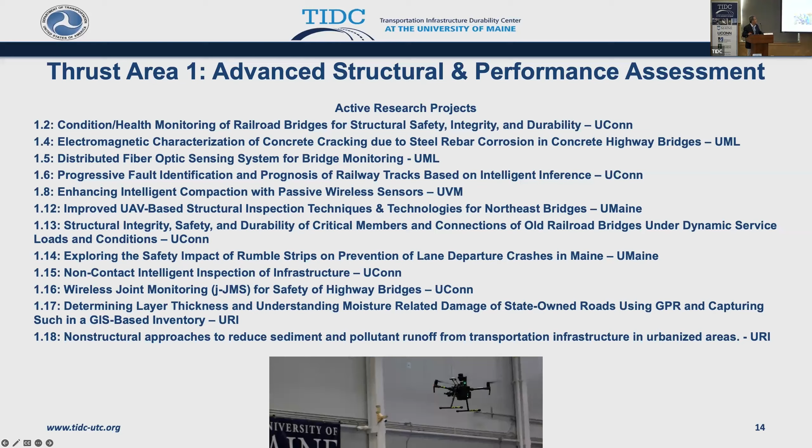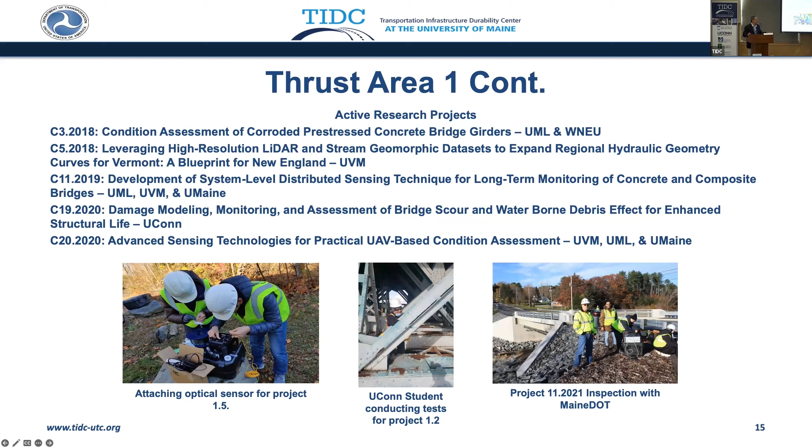In thrust area 1, there's a number of active research projects. You can see here researchers putting sensors on bridges, UConn students conducting tests for a project, and an inspection of a new next generation bridge that was developed at the center here in Hampden, Maine, being tested in collaboration with the Maine DOT as well as researchers at UMaine and in Massachusetts.

Some projects have been implemented as part of this work in thrust area 1. A major project that Professor Bill Davids has led is field testing of existing bridges. Oftentimes the analysis shows us that a bridge should be posted or shut down, and you ask yourself, is it really ready to be shut down? Is there any more life in that particular bridge? That's the question Professor Bill Davids asked himself. So he's developed advanced numerical tools and analysis methods, combined with load testing, to actually see if the bridge really needs to be posted or not.

What we found out is he's been able to save a lot of bridges from being posted or shut down. That's the big deal - that saves a lot of money. Can you get another 5 years on a bridge? Can you get another 10 years on a bridge? That's really what Professor Bill Davids has done, and done very well. That technology has already been implemented, and we've prevented a number of bridges from being posted or shut down.

That's a big deal. Another technology you see at the very bottom is a new bridge girder technology that was developed at the University of Maine. Working with the Maine DOT, we've implemented that, as well as the U.S. Army Corps of Engineers - you'll be hearing from them in just a short while. That's a collaboration between the U.S. Army Corps of Engineers, Maine DOT, and our programs, and we developed a new girder system that's quite a bit lighter than steel, will require less corrosion, lighter than steel and concrete, and it's made out of composites.

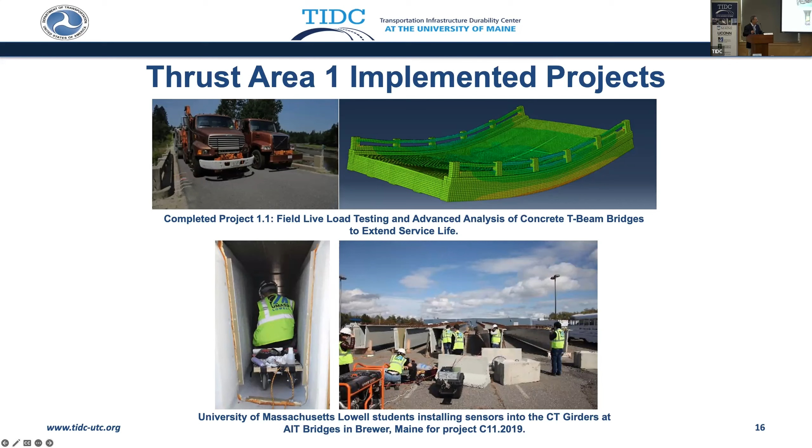Other implemented thrust area two: developing and implementing new material systems. This is an idea that came up actually from the Maine DOT. Culverts are being right now overcome by downpours, as you saw here just the last couple of days. Because of climate change, we're getting more and more extreme storms, whether it's in Vermont or Maine and other places. The culverts get overcome and the roads get washed out. Can we increase the volume of water that goes through a culvert?

So Professor Roberto Lopez-Anido, working with the Maine DOT, developed a 3D printed culvert insert. It starts as a circle on one end and becomes an oval on the other end. By changing the geometry of the culvert from a circle to an oval, you create a Venturi effect that actually pulls more water through the culvert, and you can produce about 30% more water through that culvert. So if you insert that inside an existing culvert, you can run more water through it and potentially avoid having a bridge or road being washed out.

The question is, how do you make something of this size? How do you actually make a culvert insert that fits exactly within a culvert that's been built 30 or 40 years? You don't really know what the culvert looks like. Could you go scan that culvert and 3D print an insert that fits perfectly in it?

And that's what we did. We 3D printed that, and it's made in pieces so it's easy to pick up. You can see the pieces, they fit together, and it's easy to pick up and put in. My understanding is this week the state of Vermont will be installing one of these and trying it out.

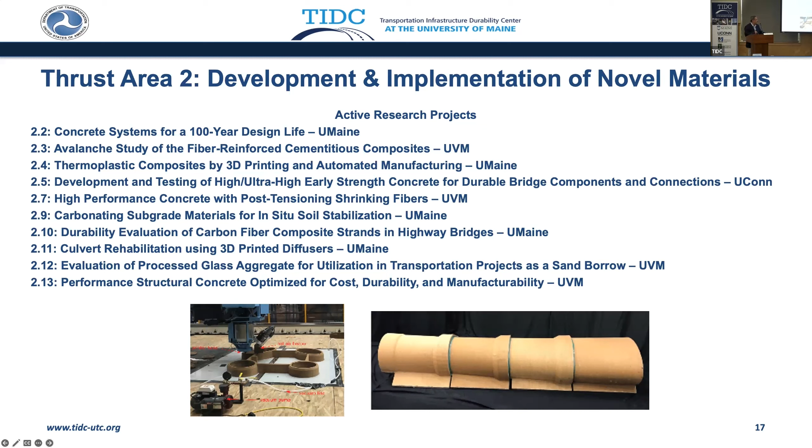So I'm excited about this bridge and look forward to seeing it operating in Vermont soon.

There's a number of projects we've worked on. We've also printed - Professor Lopez Anido and others did some printed formwork for concrete structures. When you have a complex concrete structure, you can print formwork for that and put it in. It could be less expensive than making the formwork, stick building the formwork.

That's an example. If you go outside the lab, right at the entrance, you'll see one of the big pieces of formwork done working with the DOT. We've also been installing sensors on some of these bridges. There's a lot of work going on, working directly with the DOT and with industry.

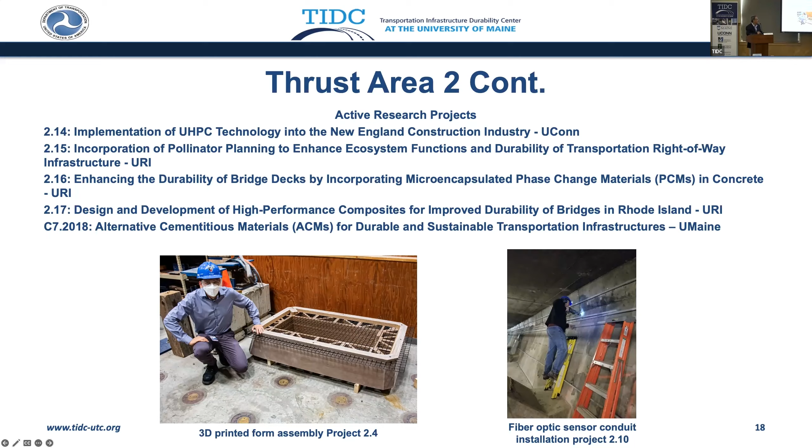This is more examples. The Penobscot Narrows Bridge in Prospect, Maine has carbon fiber composite strands, which are lighter than steel, being monitored by the University of Maine under a particular project to compare steel tendons to carbon fiber tendons.

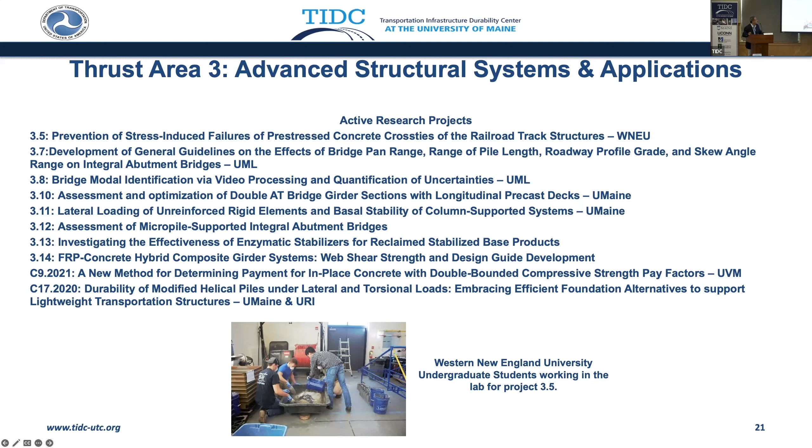These are the carbon fiber - see, looks like we're getting backwards for some reason. Advanced structural systems - this is how to take different materials and put them together to create systems. I talked about that a bit earlier, but this is the new girder technology. We call it the CT girder technology.

You can see how these girders were shipped from Maine to Fort Myers, Florida on one flatbed. Try to do that with concrete and steel bridges - you couldn't put that many girders on a truck. You'd need multiple truckloads to do that, and that reduces the carbon footprint of transportation.

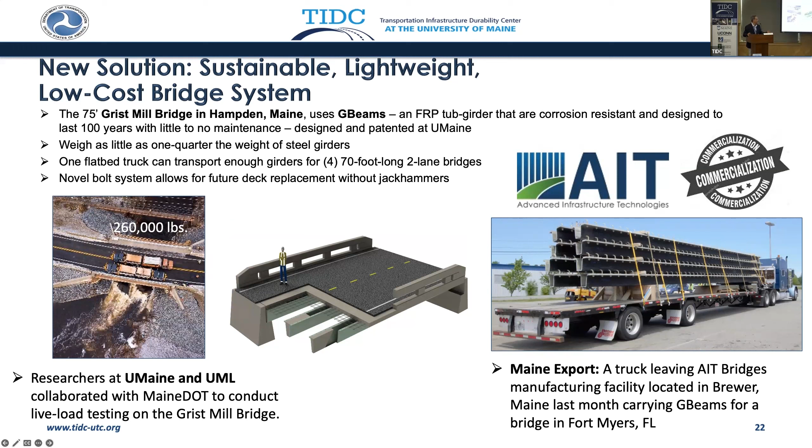And when these bridges get out there, they're so much lighter - you don't need heavier cranes. You can do the installation of the girders with lighter cranes. This is another view of the bridge that was installed in Hampden, Maine, and opened in December 2020.

There's another installation of this technology - that's a double tub girder, where we've actually taken two of these girders, put them together with the pre-installed concrete deck on top. They're significantly lighter than other technologies, and these can be put together off-site, with a concrete deck put on top afterwards.

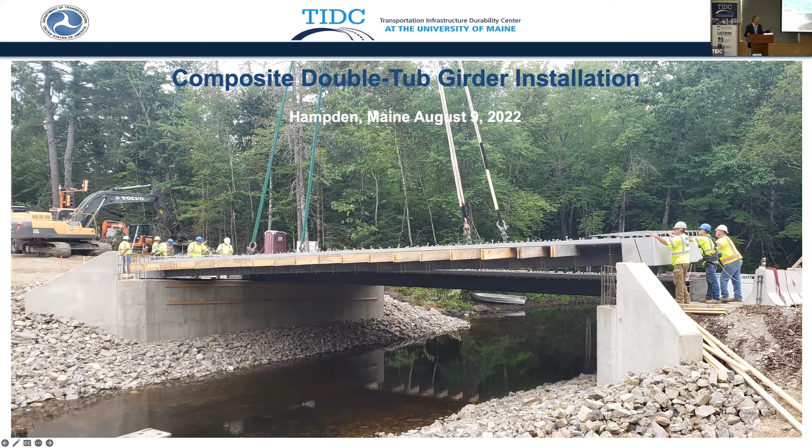So there's a thin concrete deck on top of the double tub girders, or double girder system. That's another way to speed up construction and mimic, if you wish, what we do with other material systems.

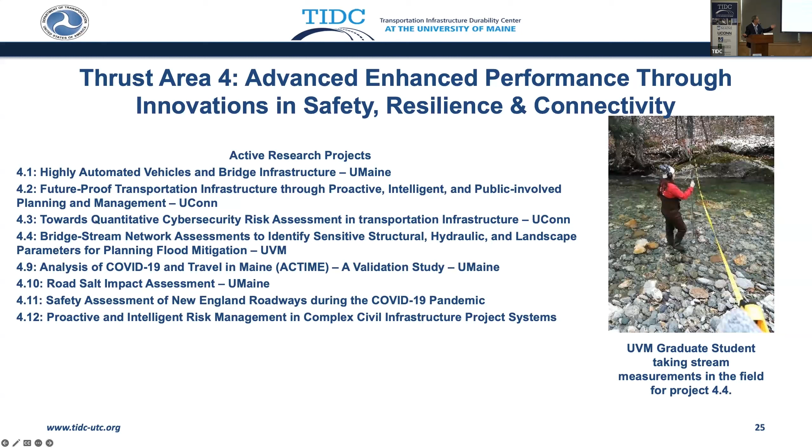The final piece of this, the final thrust area, is innovations in safety, resilience, and connectivity. There's a lot of projects that you see here - we won't have time to go through every one of them.

That's what you'll see in the exhibit hall - the double tub girders, double G girders with a pre-installed concrete deck and fiberglass rebars. This is an example of a bridge we're looking at extending the life significantly, and the Maine DOT and others have actually installed bridges like this already.

You can see here the girders, lightweight G girders, and that's the bolted connection I told you about a little earlier. So 50, 60, or 40 years from now, when the concrete deck needs to be replaced, you can unbolt it and put a new one in without having to jackhammer it.

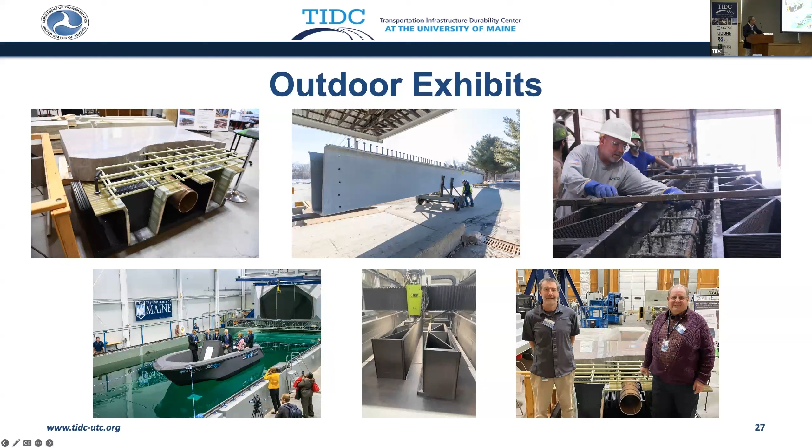So again, I'd like to thank the Corps of Engineers, the DOT, the Maine DOT, and others who've worked on that. You could see here some of the concrete formwork pieces that were also printed - you can see them outside at the entrance of this facility.